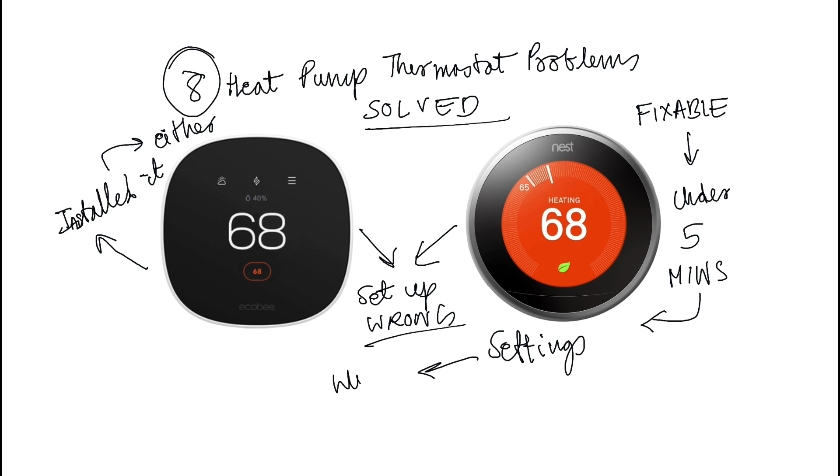Your heat pump thermostat is probably set up wrong right now, and the guy who installed it didn't catch it either. Eight problems, every single one fixable, most of them under 5 minutes inside your settings without touching a single wire. Let's go. We start with the one that makes your entire system run backwards.

When you install a smart thermostat on a heat pump, there's something called the OB wire configuration, and this controls the reversing valve, the part of a heat pump that decides whether it's heating or cooling. If you get this setting wrong, your heat pump will heat when it's supposed to cool and cool when it's supposed to heat.

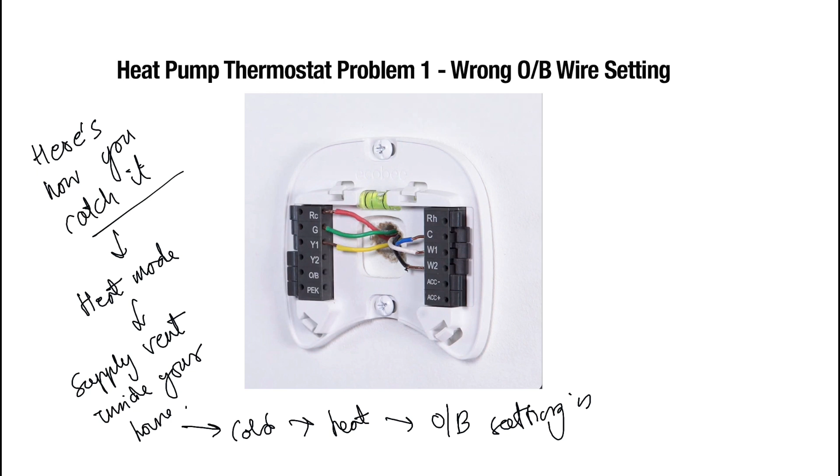Here's how you catch it. Set your thermostat to heat mode and put your hand near a supply vent inside your house. If cold air is coming out when you're calling for heat, your OB setting is backwards. That's a clear diagnosis of the problem.

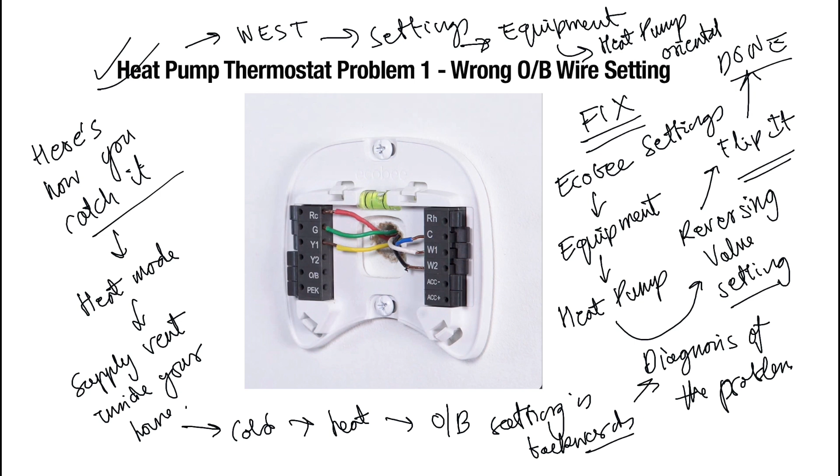Now, how do you fix it? Go into Ecobee settings, find equipment, then heat pump, then the reversing valve setting. Flip it, and you're done. Problem solved. And if you are on a Nest, then it's under settings, then equipment, then heat pump orientation. Same fix. So check this before you call anyone to fix it.

Problem number 2 is your auxiliary heat running constantly, and this is a problem that shows up on your electricity bill before you notice it on your thermostat. Auxiliary heat is your backup resistance heating, and it is expensive. We are talking about 3 times the cost compared to your heat pump running normally.

This auxiliary heat is supposed to kick in only when the temperatures drop so low that the heat pump can't keep up on its own. Now the problem is that most thermostats come out of the box with the aux heat lockout set way too high. So on a perfectly mild 40-degree day, your heat pump is being bypassed and you're running on pure resistance heat and paying through your nose for absolutely no reason.

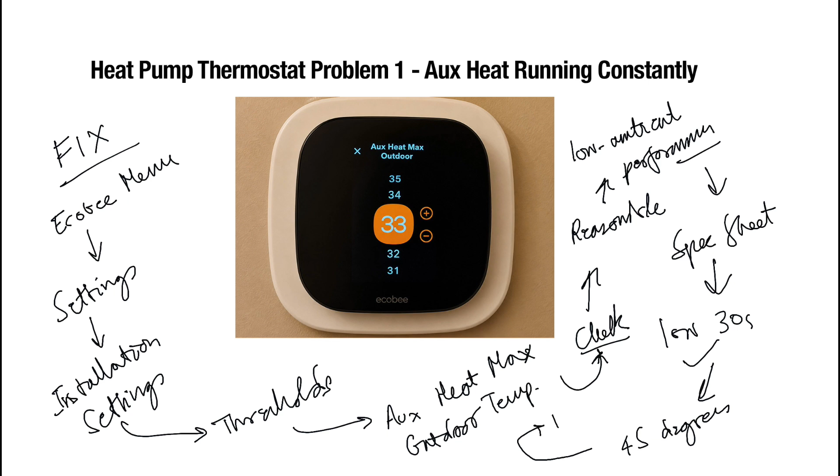So what is the fix? Go into your Ecobee menu, then Settings, then Installation Settings, then Thresholds, then Auxiliary Heat Max Outdoor Temperature. Check what this is set up to. A reasonable number depends on your specific unit's rated low ambient performance. You might have to check your heat pump spec sheet for this, but for most modern systems, somewhere in the low 30s is appropriate. If yours is set above 45 degrees, that's going to give you a massive bill. So this was the fix of problem number 2.

Problem number 3 is short cycling. This is when your system kicks in, runs for 2 to 3 minutes, then shuts off, and then starts all over again, runs for 2 to 3 minutes and shuts off. This keeps happening over and over, which means the house never gets comfortable. And of course, the system wears out faster, and everybody is busy blaming the thermostat.

Hold it up to a light source. If you can't see the light through it, replace it.

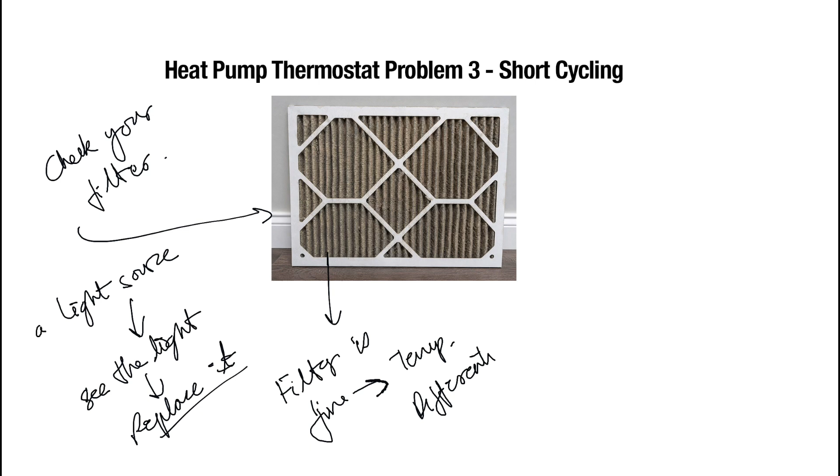But if the filter is fine, then it might be your temperature differential setting, also called the cycle rate. This controls how big a temperature swing the system waits for before turning on.

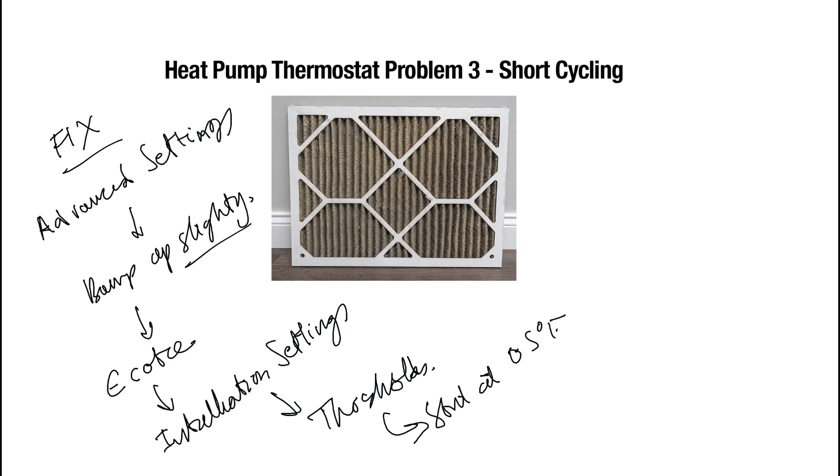If it's set too tight, half a degree can trigger a new cycle. So here's how you fix it: go into your thermostat's advanced settings and bump that differential up slightly. On Ecobee, it's under Installation Settings, then Thresholds. Start at 0.5 degrees Fahrenheit and move to 1 degree Fahrenheit. But the first thing you should do is check the filter.

Problem number 4 is no C-wire. Smart thermostats need continuous power, and it cannot be borrowed power, taken or stolen from other wires, but has to be dedicated direct power from what's called a common wire, a C-wire. Older homes often do not have a C-wire to run the thermostat.

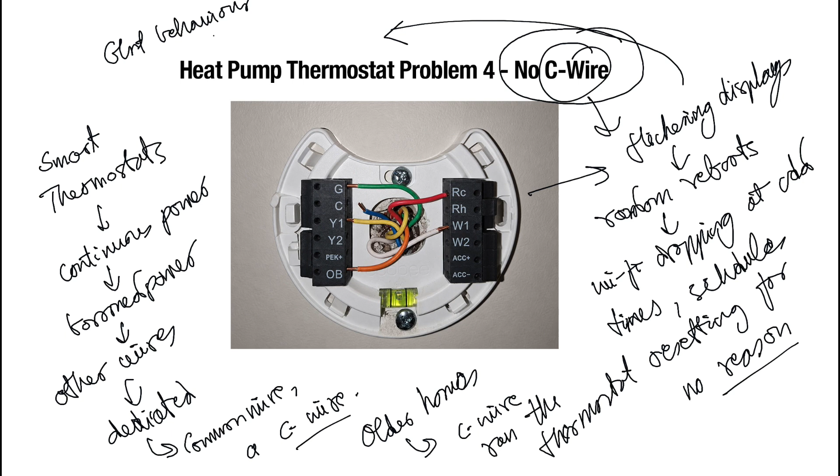When a thermostat tries to pull power without the C-wire, you get flickering displays, random reboots, Wi-Fi dropping at odd times, and even schedules resetting for no reason. These are all kinds of weird ghost behavior that makes people think their thermostat is broken, but it's actually starving for proper continuous power.

So here's what you have to look for, the C channel. There is no wire here, nothing connected. But when you look at all those wires coming out from the wall, potentially your C-wire is over there. It just wasn't hooked up.

So what you need to do is pull the thermostat base off the wall and count the number of wires in that bundle. If you find an unused wire, any color, there's a good chance you can connect it as your C-wire at the thermostat end and at the air handler end.

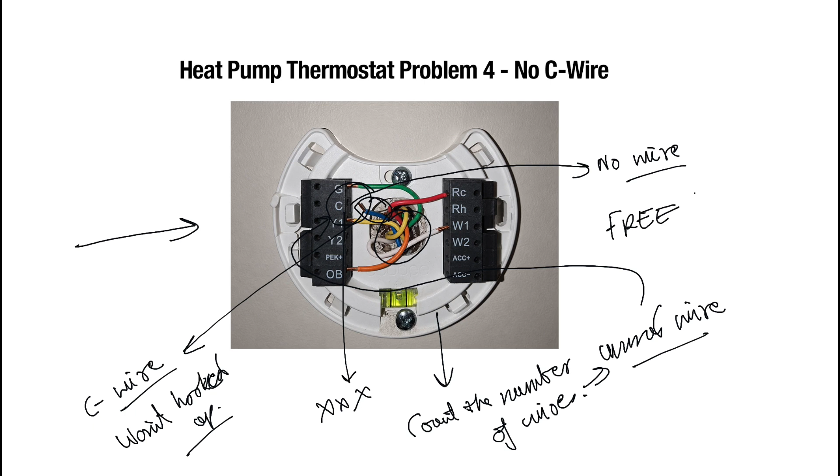It's a free fix. If there's no wire, your option is that Ecobee makes a power extender kit designed exactly for this. If you bought the Ecobee Premium or Enhanced, it's already there in the box. If you bought the Essential or the Lite, you'll have to order it, and the link is in the description.

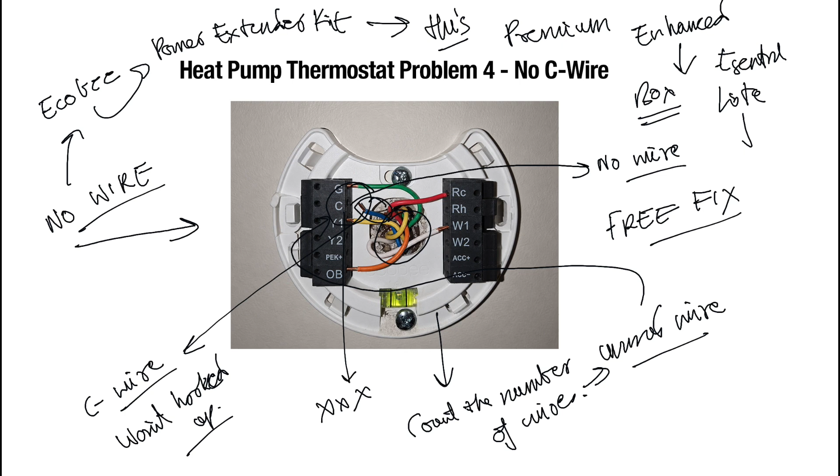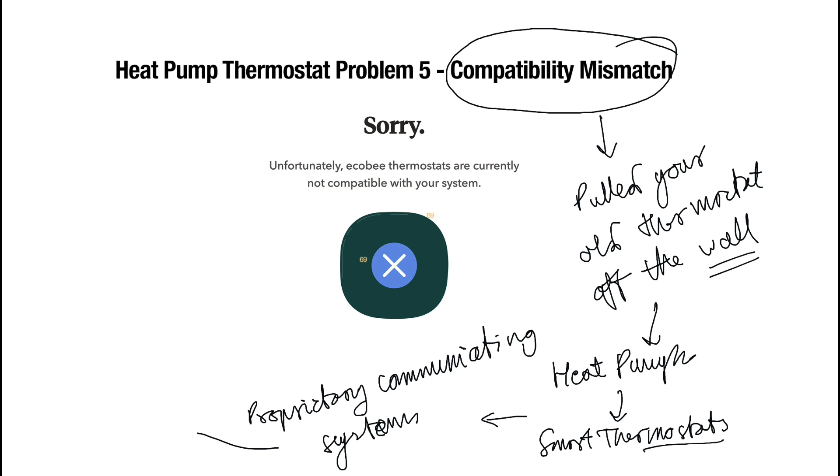Problem number 5 is compatibility mismatch. This problem hurts the most because it usually happens after you've already pulled your old thermostat off the wall. Most heat pumps work with most smart thermostats, but some systems, specifically proprietary communicating systems like Carrier's Infinity line or certain Trane setups, use their own communication protocol instead of standard low-voltage wires.

A regular Ecobee or Nest cannot replace those old thermostats without losing most of the functionality, and sometimes all of it. This is the screen you end up seeing, and most people see it after the old thermostat is already in a bag of trash.

Before you buy anything, go to ecobee.com, find their online compatibility checker, and enter your system details. Nest also has one. These 2 minutes that you spend now will save you a very bad afternoon later.

If your system does come out incompatible, then you're not out of options. You may need a system-specific thermostat or in some cases a workaround interface board. You'll have to reach out to a professional to find the right components for your specific system model.

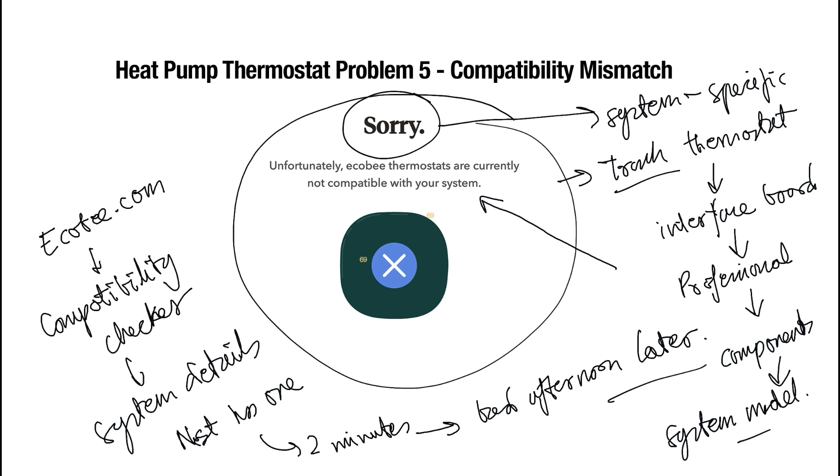In the first case, where you set 74 but it doesn't go beyond 69, the problem may be your thermostat placement. If your thermostat is near a drafty window, above a vent, on an exterior wall, or even in a hallway nobody uses, it'll be reading a false temperature. The thermostat thinks the house is comfortable when it isn't, or will think it's cold when actually the rooms are fine.

Basically, the thermostat is making decisions based on bad data, and if you find that you can't move your thermostat to where you want it to be, there is a solution where Ecobee supports remote room sensors. You put sensors in the rooms that matter, and the thermostat averages across them. That's a great solution for this.

Second cause: this is usually because the heat pump is undersized for the space, and if that's the case, no thermostat can fix it. The system is not being able to produce enough heat physically. That's an HVAC conversation and has got nothing to do with settings.

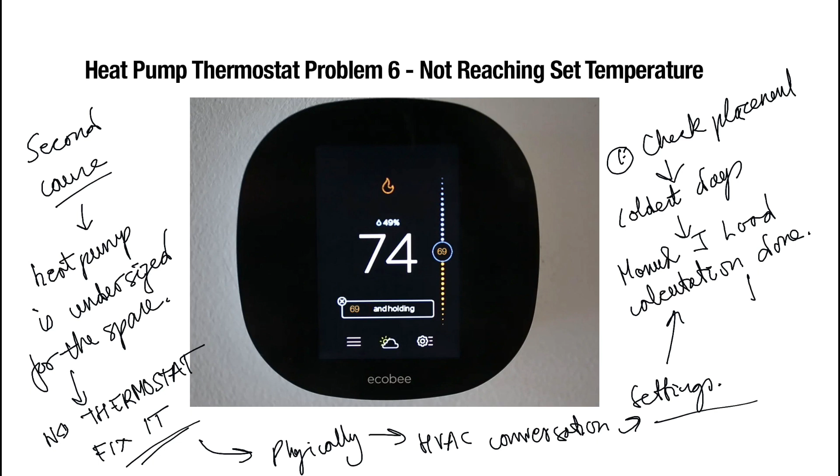So all you have to do is first check the placement, and even after fixing the placement, if the system is still not being able to close the gap on the coldest days, get a manual J-load calculation done. That will tell you exactly if you have a sizing-to-space problem.

Problem number 7 is that the emergency heat has been left on, and this is a problem that causes a big bill shock, and it's always by accident. Nest tells you right here on this screen when you switch modes that this can be expensive, but people tap straight past it.

This emergency heat mode bypasses your heat pump entirely and runs on pure resistance heating, and this is there for when your heat pump has a fault. Either the compressor is down, or there's a refrigerant leak, or something is broken. It's a backup for a broken system and definitely not a cold weather mode.

But people go ahead and switch to it during a cold snap thinking it will heat faster, or they switch it on to troubleshoot something and then forget to switch it off, and then suddenly they'll get a bill that is double what they usually get.

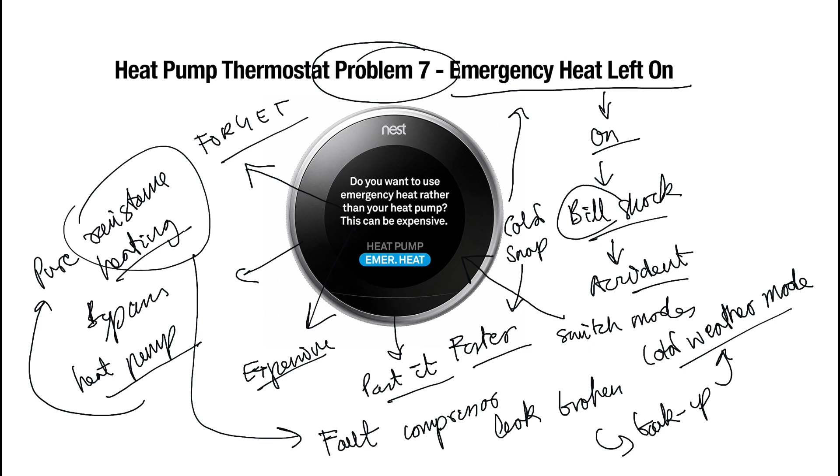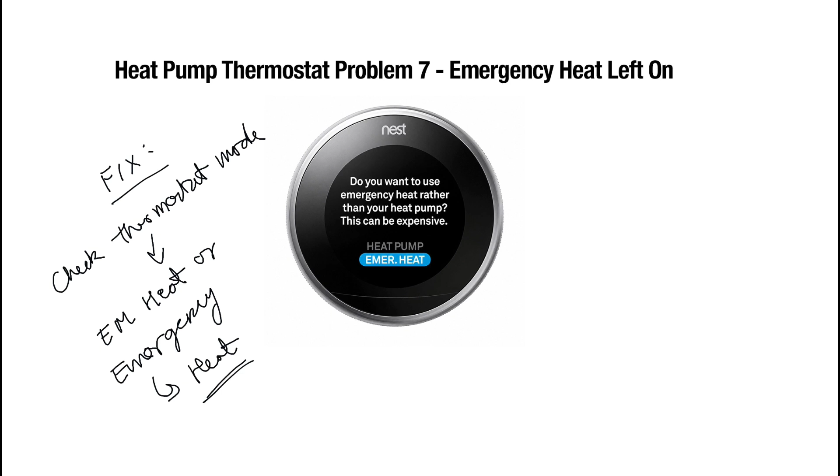So right away, before you do anything else, check your thermostat mode. If it says EM heat or emergency, switch it back to regular heat. Your heat pump is designed to run in cold weather, that's what it's built for. Emergency heat is only there for when the system breaks.

It's a backup. Problem number 8: the schedule is fighting the efficiency curve. This is the last one, and it's one that no one talks about. If you've got a smart schedule set and your bills are still higher than you expected, this might be the reason why. Essentially, heat pumps work very differently to gas furnaces.

A gas furnace can slam a cold house back up to temperature in 15 minutes. A heat pump asked to do that will struggle and will trigger auxiliary heat to close the gap, which will wipe out every dollar you saved from the overnight setback. That 10-degree gap every morning, your heat pump looks at it and calls for auxiliary every single day, before you're even out of bed.

What is the fix? Smaller setbacks. Instead of dropping 8 to 10 degrees overnight, drop 2 or 3. The heat pump stays in efficient operating range and doesn't trigger backup heat, and your morning recovery is smooth.

On the Ecobee, there's even a heat pump efficiency setting that is worth enabling. It's designed specifically for this situation and learns how long your system takes to recover, so you're never asking for a fast start recovery in the morning. Worth turning on if you already have it.

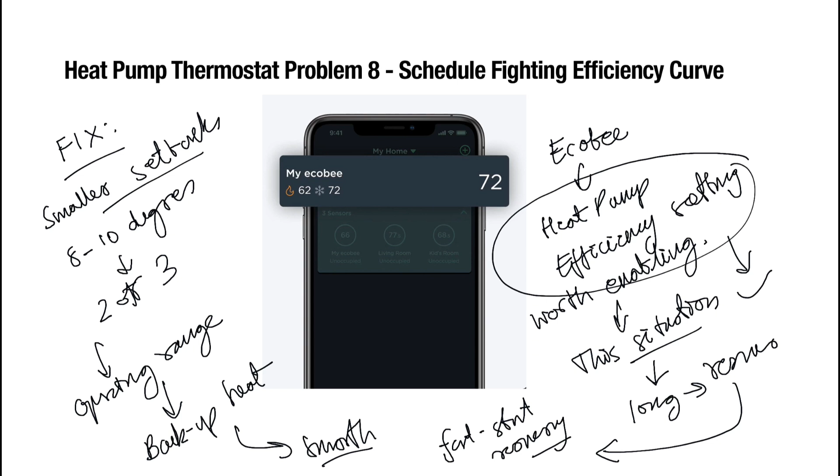It just might feel counterintuitive that you're saving less overnight, but then you're not burning expensive auxiliary heat every morning either. The math works out in your favor, finally.

So here are the 8 problems. Almost all of them are settings issues, not hardware, not your heat pump, not a call to an HVAC technician at $150 an hour. The O/B wire, the auxiliary lockout, the filter, the C-wire compatibility, placement, emergency heat, and the schedule setback.

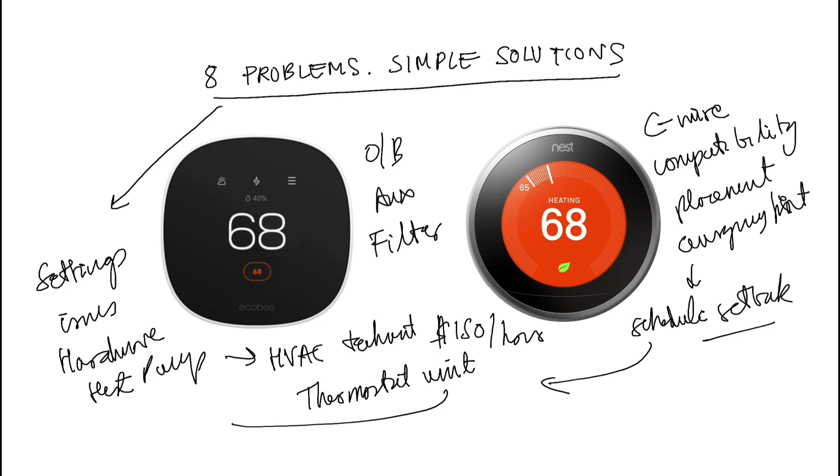Go through the whole list. Check your own thermostat unit. I'm pretty sure at least one of those is sitting wrong on your system right now.